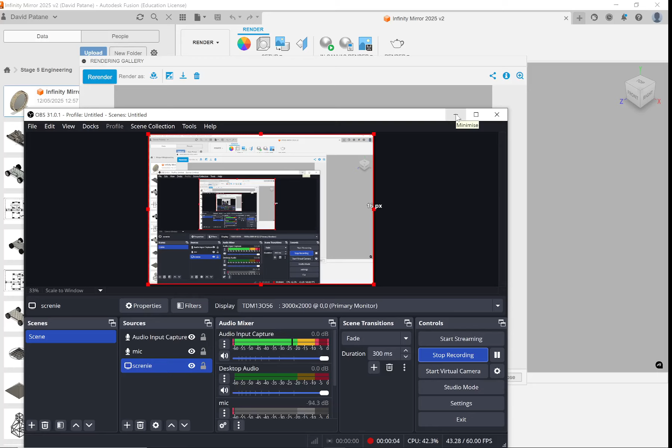This is the lamp tutorial, one of the lamp tutorials on Fusion 360. This is not a basic tutorial. At this point, we're going to assume that you have a 3D model of the tutorial. I'm going to show the basic 3D model of the tutorial, but we're going to add in elements to get like a wood finish and a mirror and these LED lights so we can get this sort of infinity mirror effect. All right, let me close this.

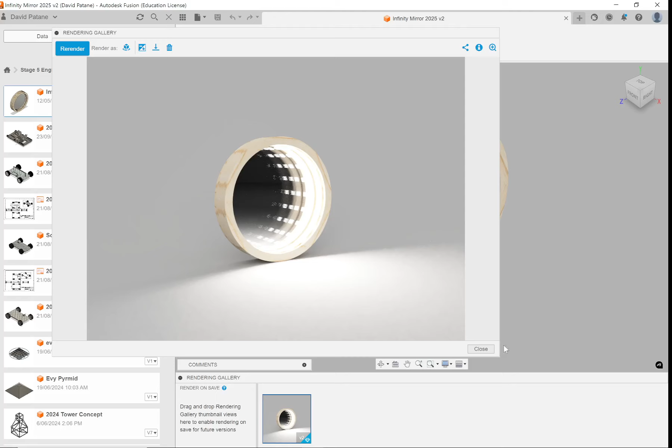We're going to start. Before I close this, I'll show you what this design looked like. Oh, not animation. I'll show you what this design looked like before we got it to the render, so we know we can get to a situation similar to this. So this is what our drawing is.

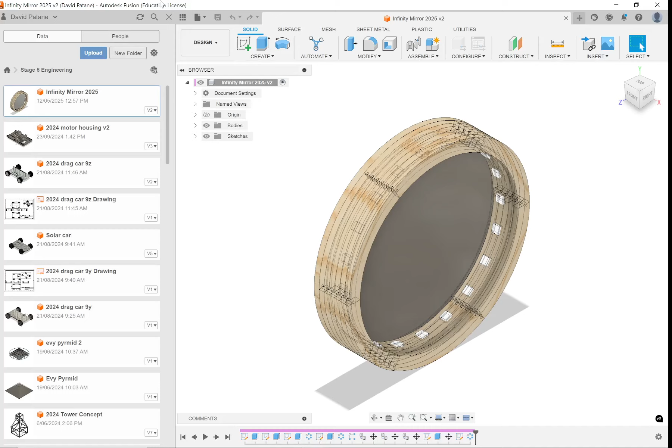In this view, in the design view, notice there's no reflective materials here. The light's also not emissive, but we put the material elements onto this design. So when we did it in our render, it came out and looked nice in 3D and had reflective light. So I'll close this. We'll start with something new.

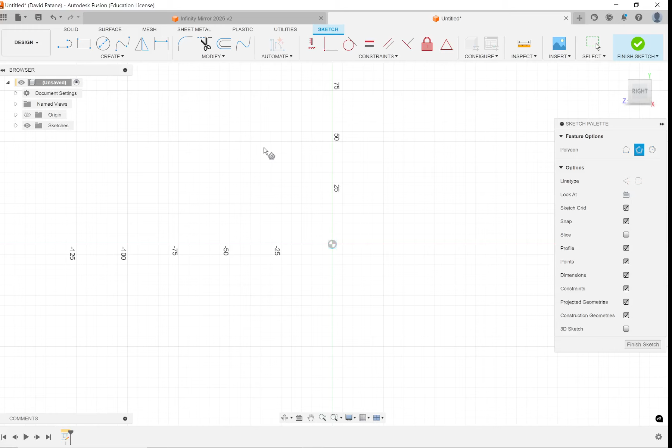For this design, I did a circle for my previous one, but this one let's do a polygon. Just for fun, let's do a hexagon. Again, my size really doesn't matter, but let's say I do this 50 centimeters. That's my hexagon over there. That's the length I'm going to try to follow.

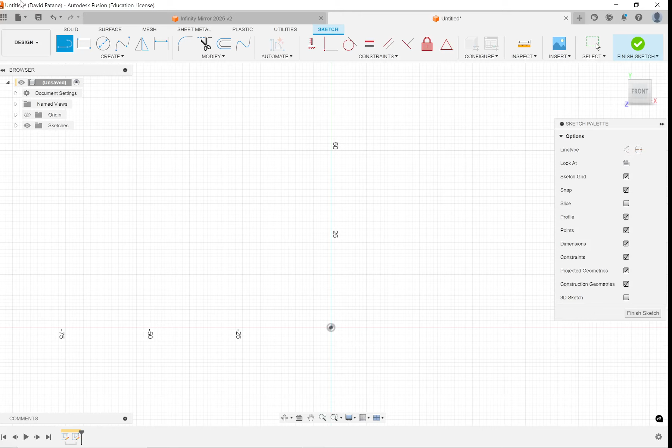Then I'm going to sketch again. I'm going to make the profile that I want my design to follow. And this profile is going to be like the side view of my wooden barriers on the outside. So they're going to have their little lip for the mirror as well. So I'm just going to draw.

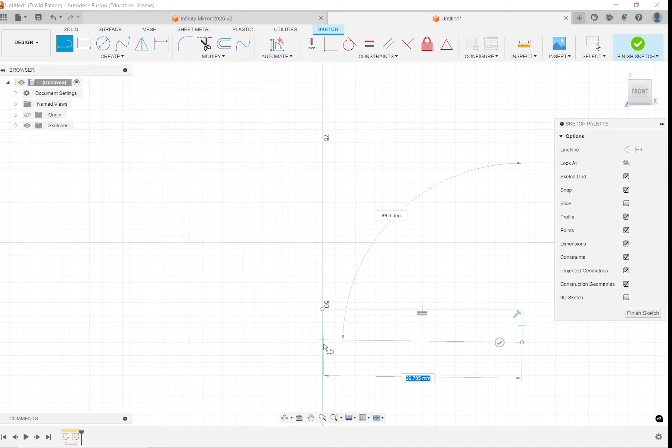Do you remember how thick the piece of timber was in Sir's one? It's like 5 centimeters, right? Let's just assume 5 centimeters. That's pretty big, actually. Let's try 3 centimeters. So let's say we have a 3 centimeter piece of wood here. It goes flat. This is the side view of our piece of timber.

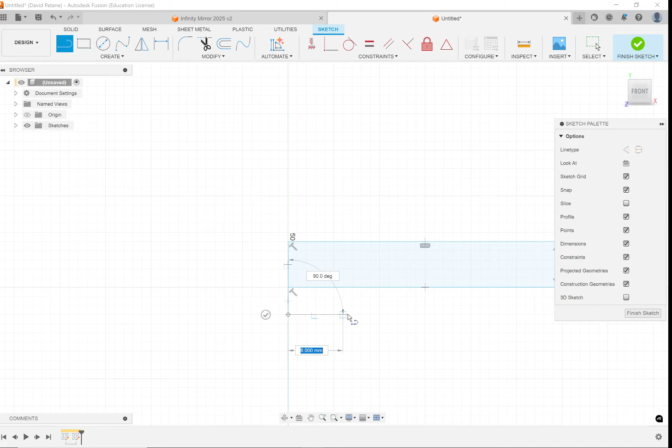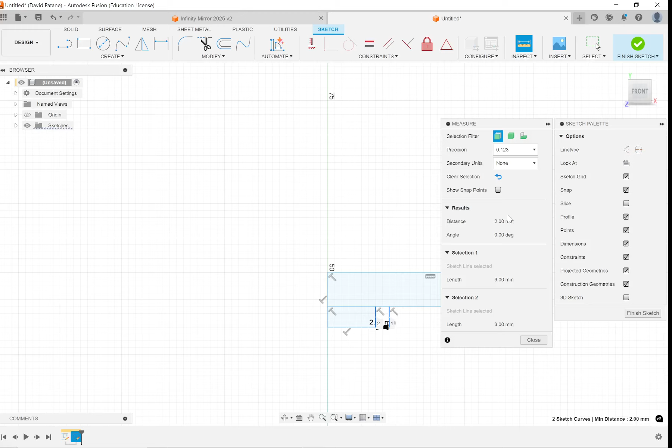And then in our design, we had pieces of plywood raised up on the sides so we could get the rails. So I'm going to draw that plywood here. The plywood is 3 millimeters. 1, 2, 3. The back mirror is 2 millimeters thick. So I'll make a groove there. So this line over here, if I inspect this line, that should be our 2 millimeters. That's going to be for our mirror.

And then we're going to do the same thing at the front, except our front mirror is going to be 3 millimeters thick for the ply. This line over here is the distance between these two lines. I can check over here. We see it is 3 millimeters thick.

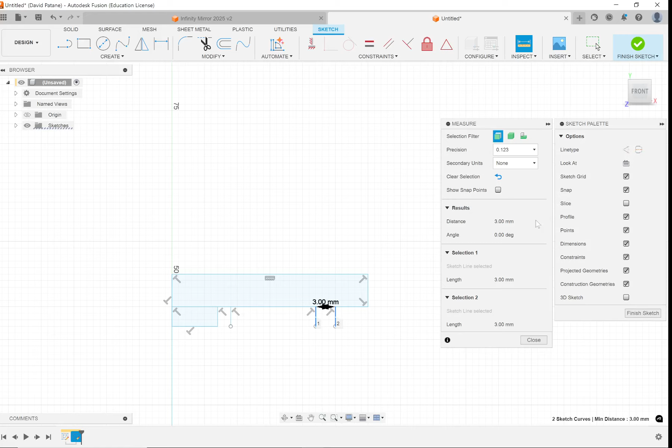And when we're doing Fusion, when we have our object, we need to make it solid blue. So we have to connect these lines together. Connect. Right. So does this shape look familiar? This is like the piece of the border. It's going to look something like this, right, with our piece of timber. We can finish with that sketch now.

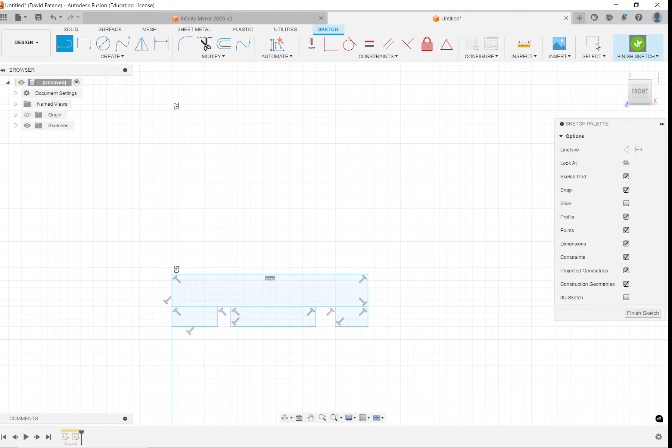The reason why I did it this way is we're going to use a tool. This is because I have like a hexagon shape. If you just have a square shape, we can get our extrude tool and we can just click these surfaces. And we can just extrude this out and it'll make that shape, right? That's if we have a square or rectangle, that's fairly easy.

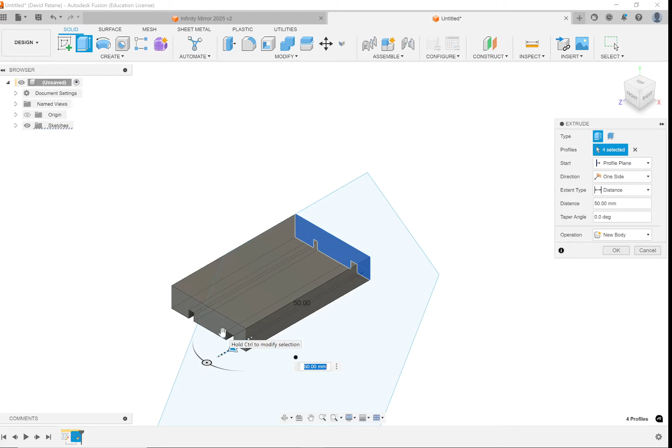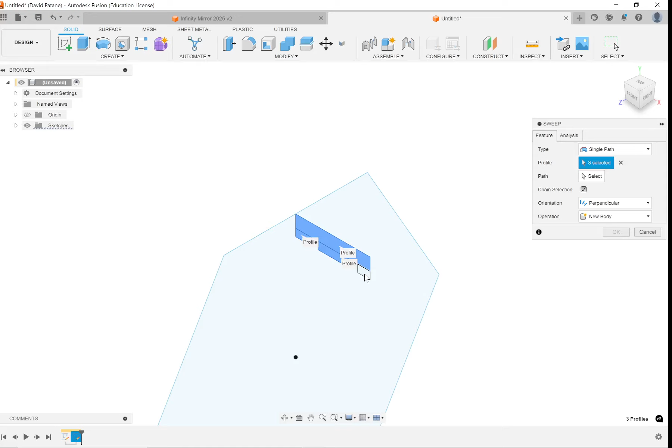But I want to see if I can get it to follow this particular pentagon shape, hexagon shape that I had here. So we're going to use the sweep tool. And what the sweep tool does is we can get this profile, and I want this profile to follow the hexagon lines we have there. So I've selected these 4. We see here it's dark blue, this whole profile.

And then the path, I'm going to pick this hexagon shape that I have over here. So if I click this, it now follows the shape. And so that's our entire border done. It even does all the curves.

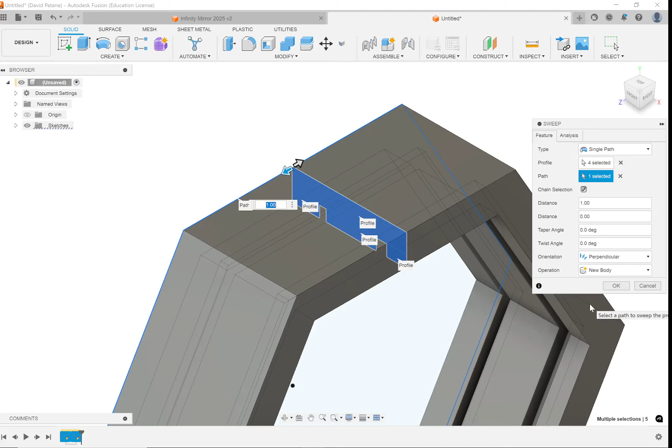It's going to look a lot better than yours in real life because you're going to cut yours and you're going to have weird joints, but it makes our life a lot easier, especially since our drawing can be our idealized design. And I can press OK. And so we have that drawing.

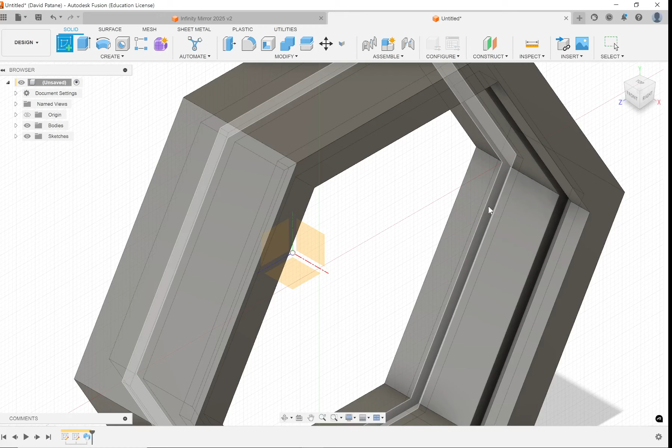Next thing we're going to have to do is make the mirror, and we're going to have to make the reflective material. So I'm going to go to sketch. When I sketch this, I want to click this surface inside here because I made that a little bit of a channel with a bit of depth there. I want to click inside here, and now we see there should be these lines forming here; that's our inside border of where we want our mirror to be.

We can sketch this out if we want. We can get our line and we can follow it. But we have this line here, so we may as well already use it. I'm going to use the project and include tool. We're going to say project. And what I want to do is click this object that exists already. No, I want to press this option over here to include a body. And I want to click this body, which is the one that we just made.

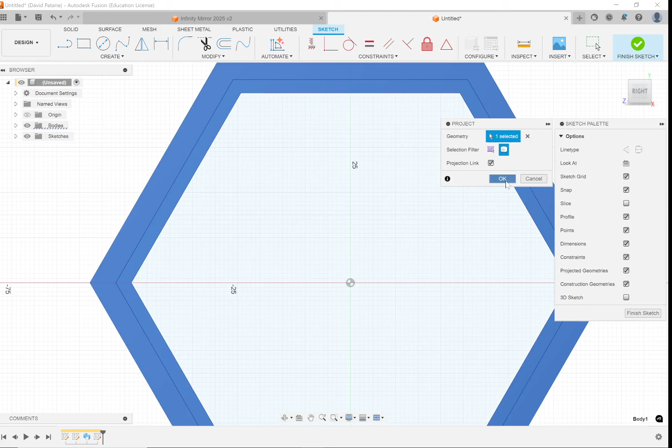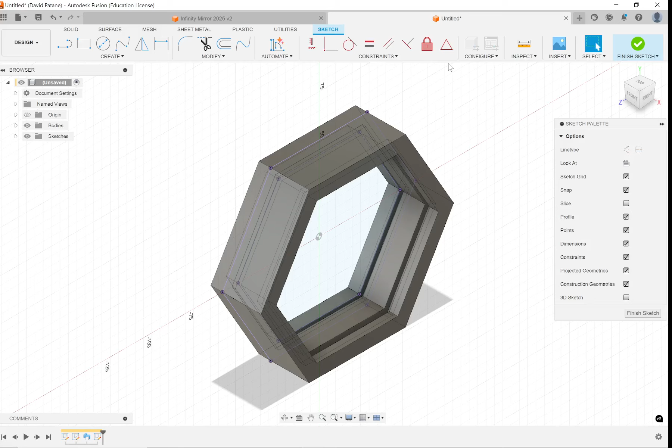And then if I press OK, now, if I do it in 3D here, we see how we have these purple lines forming, so we can use those in our drawing now. Which means I think I can finish this sketch. I can press extrude. I can click that surface and I can actually start making that wall, but I also want to press this inside area in there. So now I'm going to make the mirror.

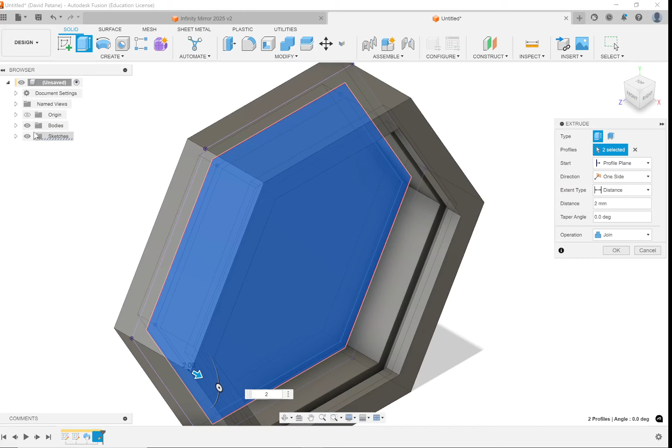The mirror is 2 millimeters thick. If I press enter here, it's going to be a problem. It's going to make this all into one body. So the wood and the mirror are all going to be one body, and the problem is I can only make it one material. I don't want that. I want a wood and a mirror. So before I finish it, when you make a new material, I don't want to join. I want to make a new body. So I press new body and I press enter. And so now I should have two bodies here.

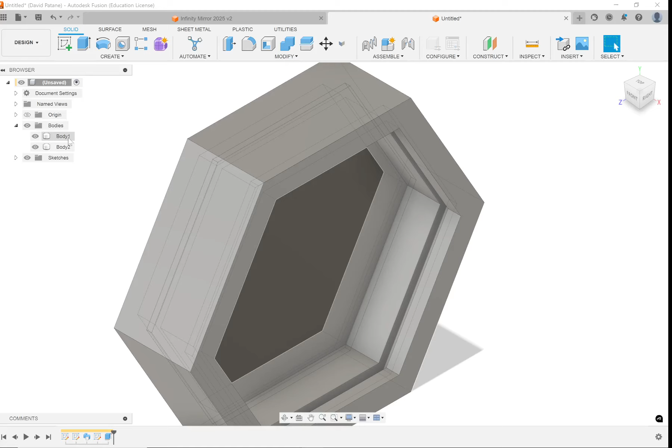So I can hide it. So you have here, this is the wood. And then if I hide the walls, that's just the mirror. And to make it easier for us, I'm going to double click this body one. And we can label this as frame wood. And then we can name this back mirror. Right? I'm going to do the same step for the front part.

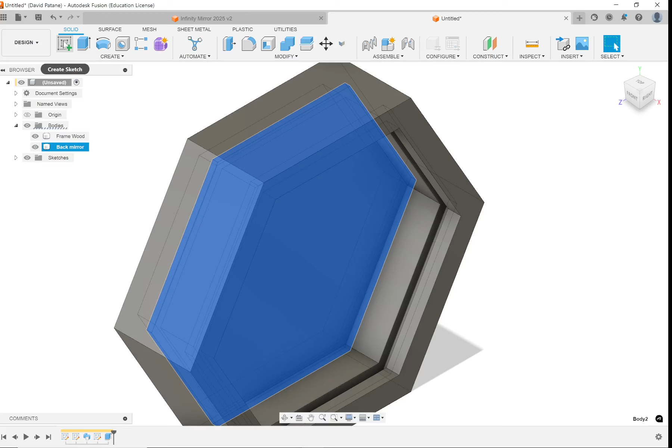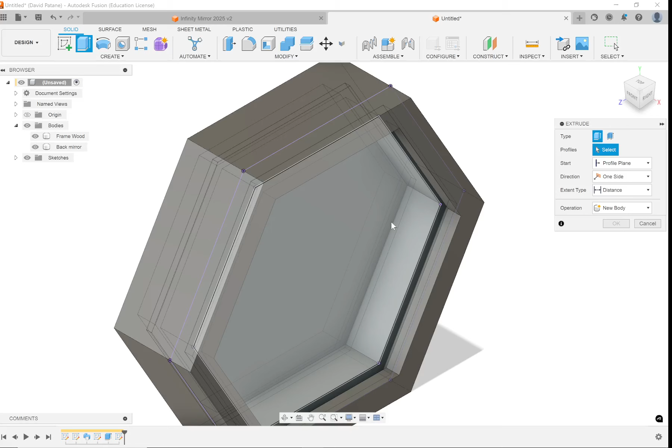We're going to go sketch. We're going to try to sketch this inside layer here. We're going to project and include, project the 3D body, click the body and press OK. And so now we can go to extrude, that face and this surface. The piece of acrylic is 3 millimeters thick, so I'm going to press 3. And again, it will automatically join.

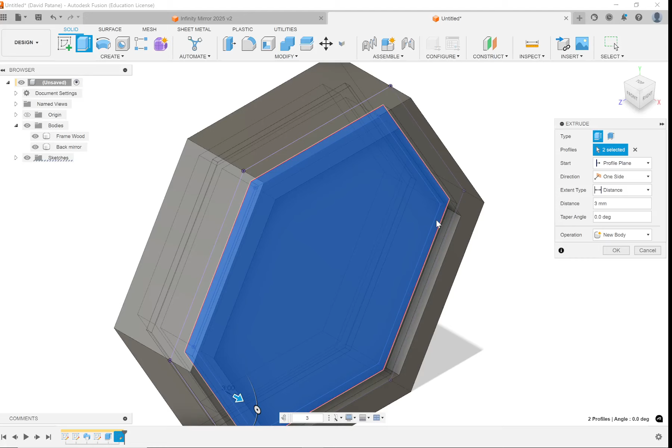Fusion will try to join. If the extrusion is already attached to an object, it will just try to join it together automatically. So we have to be vigilant and always do a new body if we want it to be a new body. And so we should expect there to be 3 bodies now in our design. 1, 2, 3, done. And we can rename this one front semi-mirror. Cool.

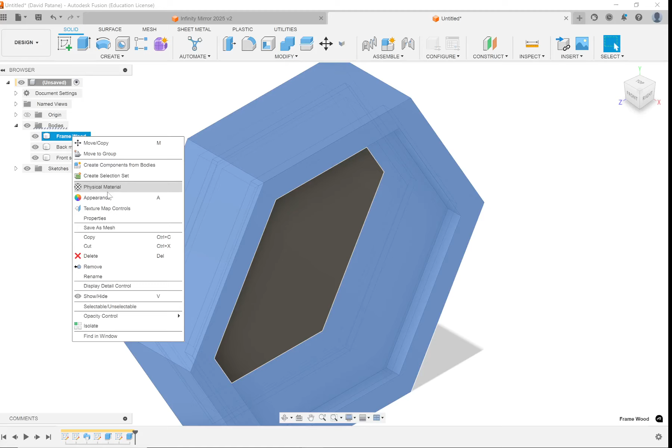So let's go and we can start labeling some of these objects, changing the appearance here. We want to right click this wooden frame. We're going to go to appearance. We have our appearance here. Now, if we type wood in this search engine, we have a bunch of wood.

There's 2 types of wood I've found in Fusion 360. The first one is 3D, and what 3D does is it tries to simulate the object as if it was cut out of a piece of wood. When you look at balsa wood cars you did 2 years ago, the wood on the side or end grain looks different than the longer parts. The grains are nice and long on the piece of wood, but at the ends they're very dotish. That's what the 3D will try to make match a piece of timber.

This other one over here, represented by cubes, is going to be uniform. So it's all going to be the same shape or color. I like to use this one.

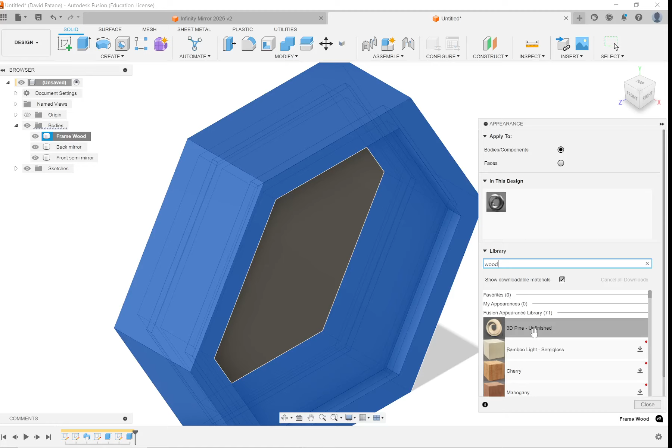I like to pick this particular 3D one if you have it. You drag it up here, then drag it to make sure it's just selected on this material, and there you go. It's like this was made out of one piece of material, so you get this end grain looking stuff. And down here, it's going to have the 2D pieces of material.

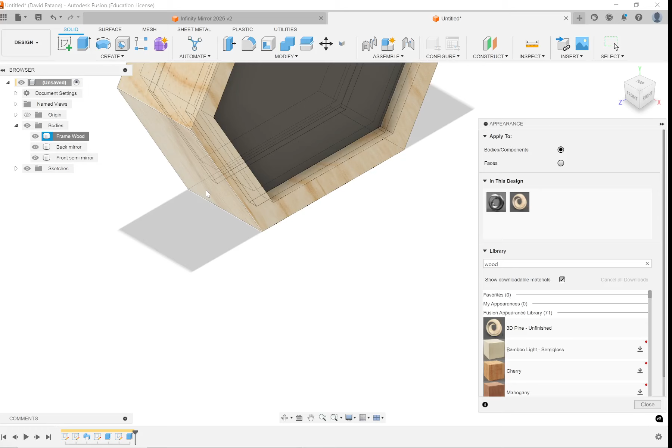Cool, and then we can do our mirrors. We can do a mirror over here, or chrome. Let's just do mirror. If we rotate to this back part, we can put this mirror over here. And now this is a mirror.

And for this front one, I haven't found a semi-mirror, but the closest thing I found was if we type glass... which one did I get? I think I got glass, a medium color.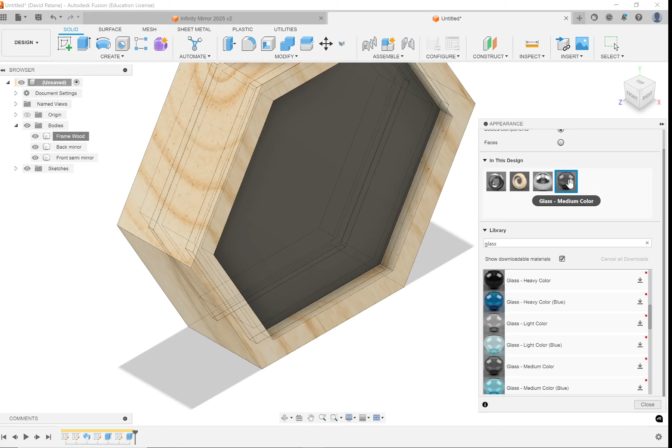If you haven't put in any of these before into your first design, you're going to have to download them. You see this icon over here to the right, it says download. So when I drag it here, I like to drag it and it should be downloading it. You might have a little icon saying to download it. Then once you have it, you can just drag it onto that part and you have that material in your design. This in theory can go and it will make our mirror.

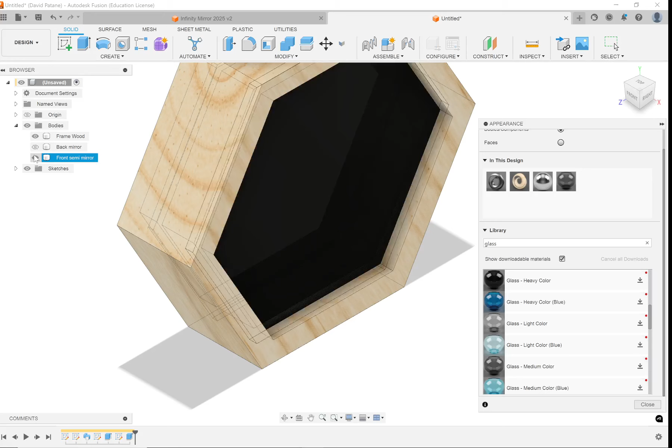The next thing we have to do is make some sort of LED lights in this design. So what's the best way to do this, because we have a hexagon. We will hide our two mirrors for now, and we know our LED lights are going to be here. So what we're going to do is go to sketch, and we'll sketch on this panel.

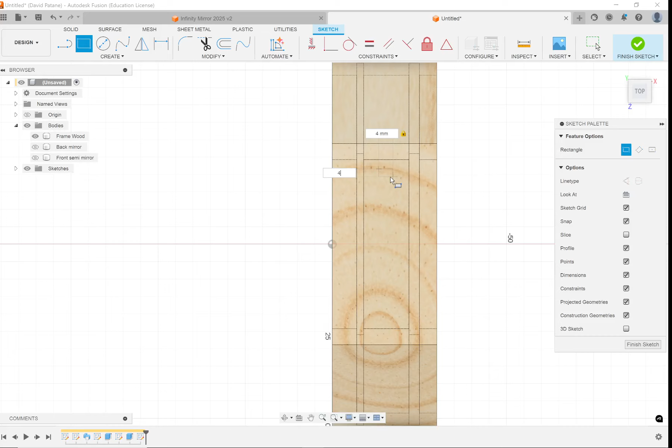Now the making of the lights is probably going to be the same. You can measure the actual length and size of the LED lights. We don't worry about the strip, just the lights themselves. From memory, I think the lights are like 4x4, maybe, or 3x3. It doesn't actually matter what they are, but we'll do 4x4. That's the light, and we can even use a rectangular pattern tool. We can click this shape we had over here.

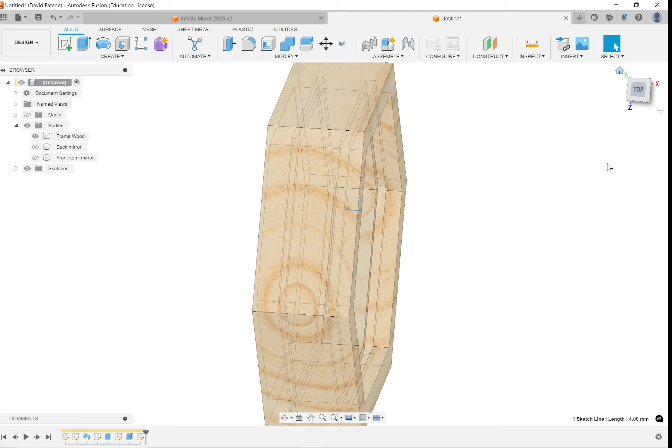No sorry, we'll just finish this. We'll get that rectangle we had there, and we want to make it as high as the LED lights are, so they're probably 2 millimeters high, I'm assuming. Actually that might be too much, let's say 1 millimeter high. And again, this is going to join, but I don't want to join this. I want to make this a new object, so I'm going to make a new body. It's an LED light, we should have a new body here. I'm going to get this body.

And this part onwards is going to drastically change depending on your design. So what I want to do here is I have this light, I want to copy this light 4 times. I'm going to have 4 lights on that bottom rail, and then I'm going to get those 4 lights and copy them radially around my hexagon. Depending on your design, you're going to change how you do that copying of the pattern.

If you're doing a circle, you just get the first light and copy it around radially. If you're doing a weird shape, you're going to have to copy it along the path and it might look a bit janky, but you'll have to take some time and try to do that. If you're doing a rectangular one, this part is going to be the same - you're going to do a rectangular pattern. You're going to select this... what do we do here? We're going to go create, pattern, rectangular pattern. It should load up here. We have a body.

We're going to select this object, copy it along the axis, pick the direction we want it to go, and drag it down here to where I want my lights to be.

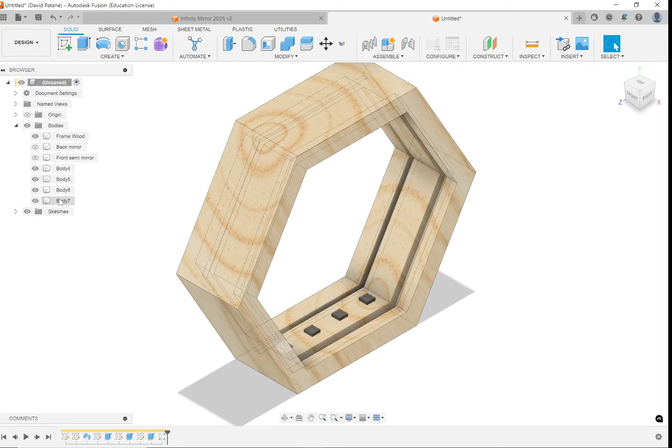Then for my case now, which you're not going to be able to do this way - if you have your square, you're going to have to then start sketching on the left side and do the square with the left side. But for my case, I can do a circular pattern.

Circular pattern. I can select these bodies. I can select them right here. 1, 2, 3, 4.

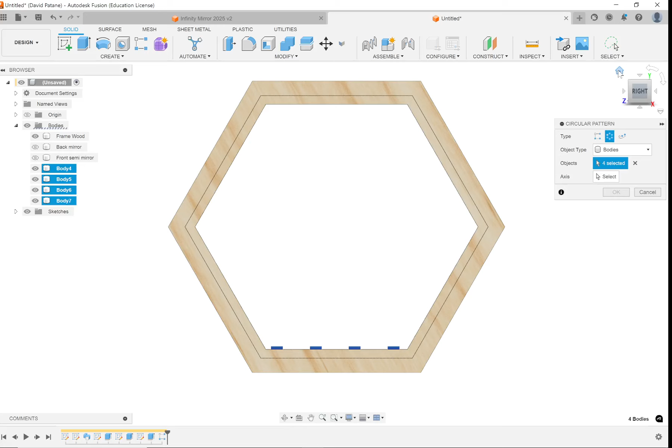The axis is going to be a bit - no, I don't think the axis is difficult actually, because I rotated around the center. Wonderful, so I'm kind of lucked out because I did a perfect hexagon, and I started my hexagon on the center axis. I can use that center axis to revolve it.

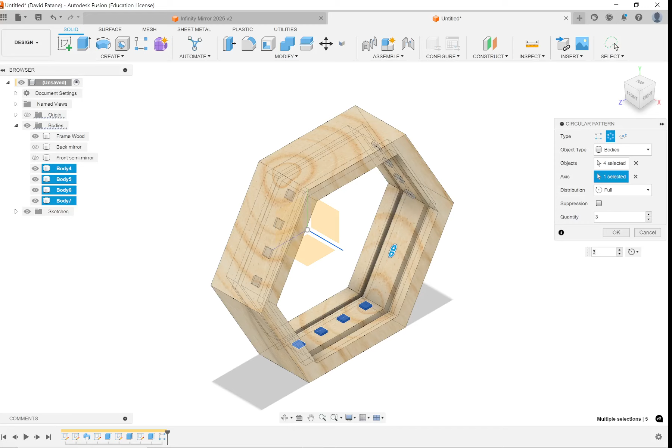See how I have 3 here, but if I upgrade it to 4, they're not going to be aligned with my object. Same if I do 5 and 6. But if I pick the same amount that I did on my hexagon, wonderful, I have all my lights here.

I press OK. Cool. Now I want to click here, and if I press Shift and click it, I can select all those objects. I can then right-click, Appearance.

To make the lights, emissive is the word I need. So these are all different light sources.

Let's just pick this particular light over here. There's LED lights - 8 lumens, 20 lumens, 50 lumens, that's all about the brightness. Now, how bright it works, I don't know. We're making up numbers really, and it depends on the size of your LED light.

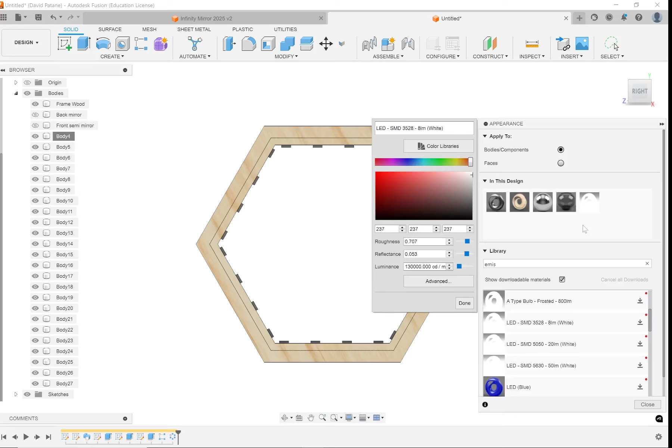You can change it, you can redo your render if you want to pick a light that's less brightness. Change it from the 8 to the 20 to the 50. You can even right-click and edit it to change this luminance value to a different number. But before you do that, I highly recommend you duplicate it first to make a copy so you don't ruin the original one. This is where you can even change the color of your light if you're doing an RGB light.

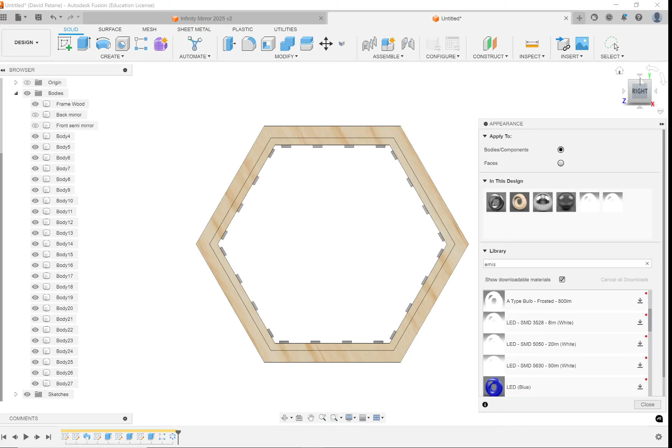So I have these, and I believe I can still select this many lights. Okay, and then I can click this and drag it, and now all these lights should all be emissive, I think. See how they're all white now?

Cool, that's my design. I unhide everything, so this is ready to be sent. I will save this.

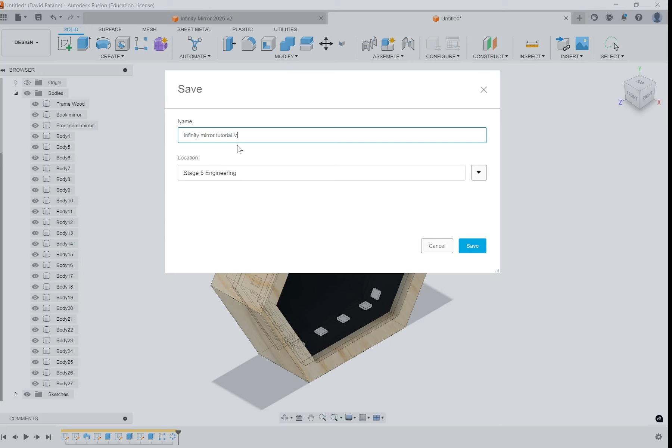Version 3. You have to save it first. Then we will go to rendering.

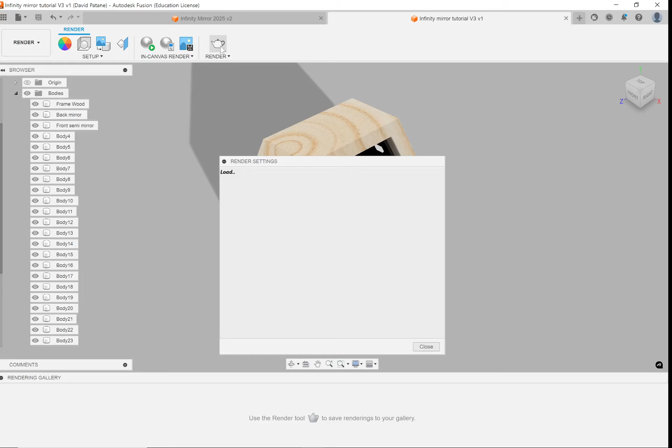So we have the drawing here. Once we're in render and it's saved and loaded, we press this render button. This is where if you have a student account, it's going to be fine. If you don't, it's going to be difficult because you only have a certain amount of tokens you can use if you do not have a student account. So I'm going to render this object here.

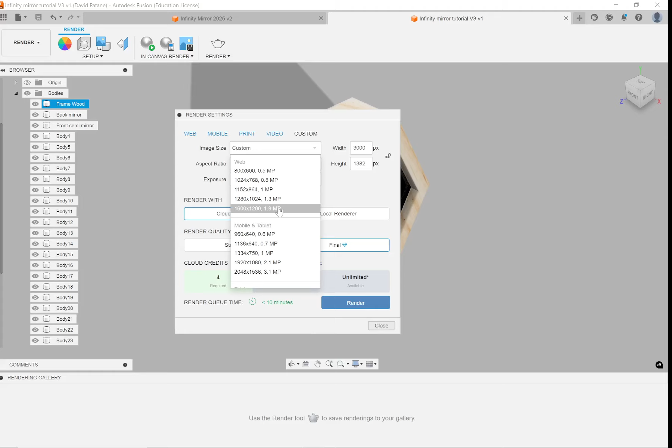By default it will use the resolution on your computer. This Windows PC happens to have 3000 by 1382, so it's a lot of pixels. So I like to change this instead to an image quality and change it to a size that's more reasonable, 1600 by 1200. Cloud render means they're going to be rendering it for me on their server computers, and you see how it takes credits. It's going to take 2 credits for me to do this, but I have unlimited credits because it's a student account. You should also have unlimited credits on your student account.

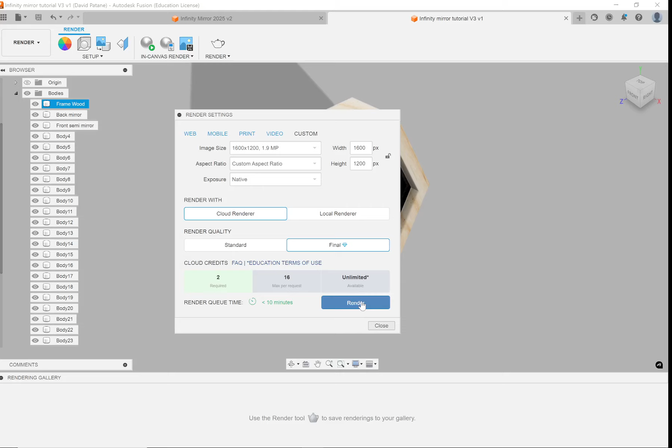And then when I press render, the cloud rendering should start, and it's going to have this little icon over here.

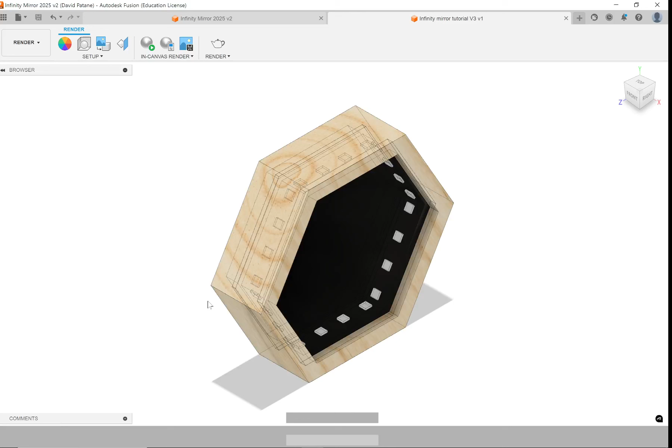This means it's uploading it or sending it to the render farm. If you come back within 10 minutes, you can even close Fusion at this point, and their servers will continue rendering it. Once they render it, we should have an image that looks somewhat like this.

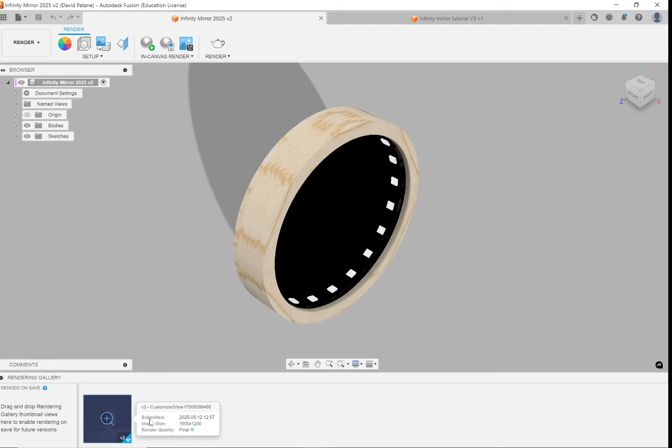Once we render it, you should have this little icon over here, and it might show a thumbnail. Then you can open it and have a look at that render. If you want to zoom in or change the angle, you have to do that before rendering, because you have to do a new render every time you change anything. Again, lucky you have unlimited renders, it just will take time for you to get the image. And this one's loading it up from their server.

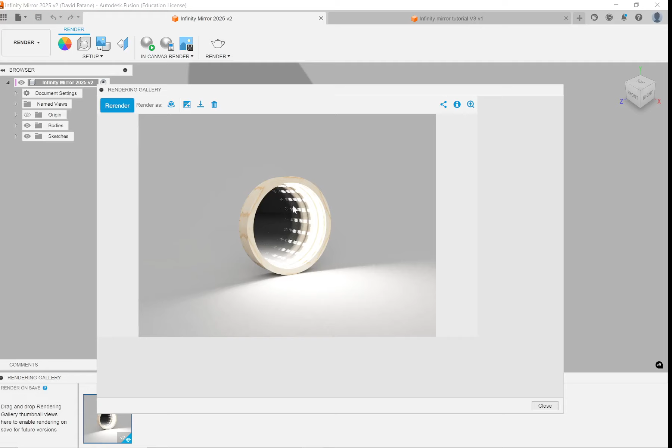When we render, we get things like reflectivity, the lights coming out, the wood at a better resolution, and it also shows the light coming out of the mirror. I think these lights are way too powerful for the examples we're doing, so that's why I tried to lower it in the example in the class.

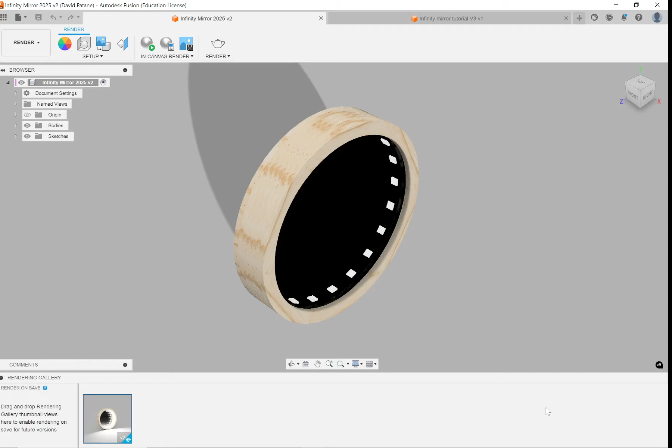One last thing before I pause the tutorial so you can work on it. Notice how on this design, the walls look like they're different pieces of timber, compared to this design over here, which all looks like one piece. That's because we did this as one single piece of timber in our design. In the first design I had here, this is...

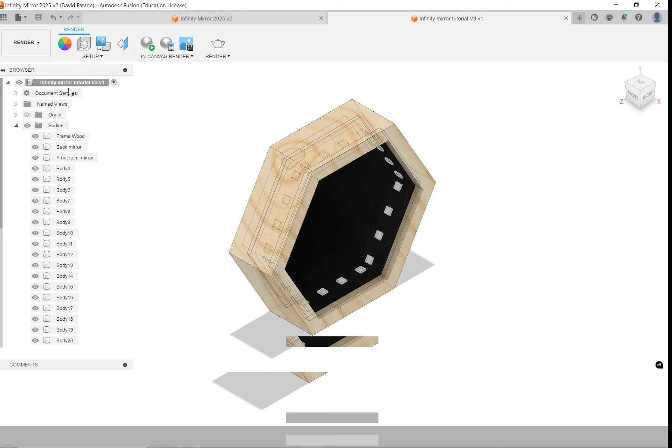...multiple sheets of timber. So when we're doing our 3D timber effect, try to make the timber look as similar to the timber that you're using. So if you're doing 4 frames, you might want to cut those up using the split body tool to have them as 4 individual pieces of timber. Then when it makes it 3D, it'll try to make each one an individual piece of timber.

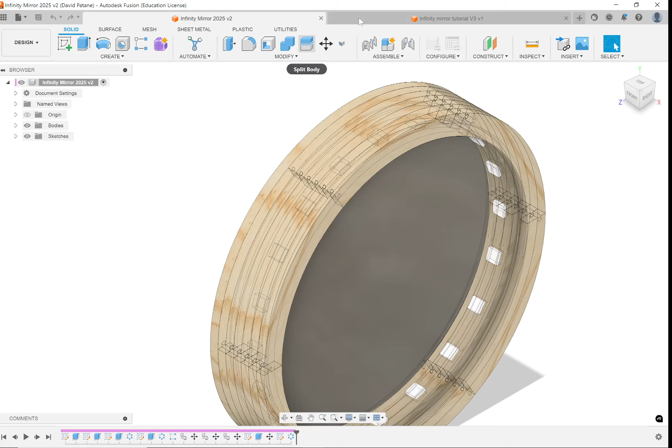Okay, I will pause the tutorial now and I'll unpause it when we have the drawing ready.

All right, so once you've finished your design here, it says it takes approximately 10 minutes. The approximation is fine, but I always like to add an extra 10 minutes to my calculations, because it's still got to compress the file, upload it, they've got to render it, and then compress it and send it back to you, and you've got to open it. So this one was 17 minutes, it was done.

When I go and open it, we will look at this drawing and it should open. Are we recording? Yes.

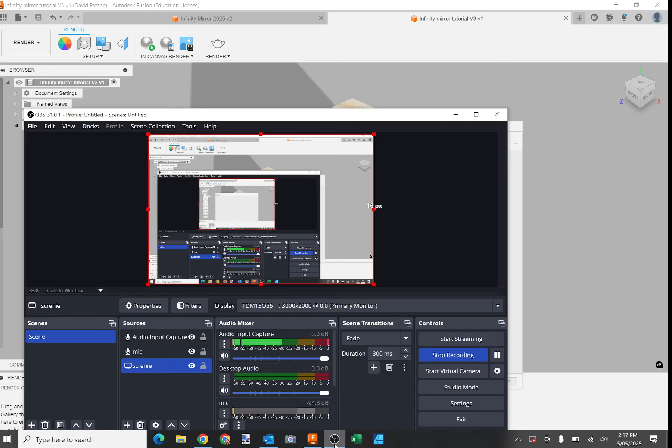Loading up the image. The bigger your image is, the more it will take to load up. So there's my mirror. If we zoom into this by making it larger, you don't really have a lot of commands here to view this image, but you can download this image using this tool and open it up in Paint or however you're going to put it into your folio.

Now, clearly the infinity effect is happening here. We see these little lights going off into the distance. If I was to do this, I'm going to render it again, but I'm going to halve the luminosity of my lights until I get one that gives the right effect that I want. You can also do stuff, I might do another example where I'll put a template in front or put a flower inside it. I might do a bee because it's a hexagon, it looks like a bee thing. And we'll do that and see how that light goes.

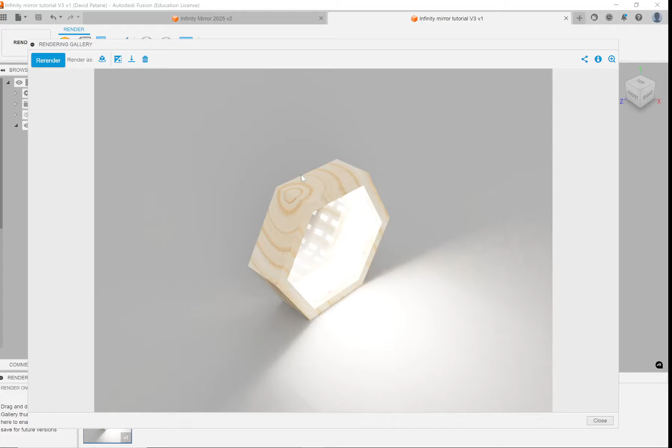When you're putting this in your reports, you can download this file if it looks very nice, but if it's just in your report, you can also just do a screen capture and pick this particular object. Things you can do in the rendering, you can also change your scene over here by changing the environment. You can make it like a grassy field or inside a city, but that's not really super relevant. Let's just worry about getting the light reflecting on your mirror. But that's it for this tutorial.